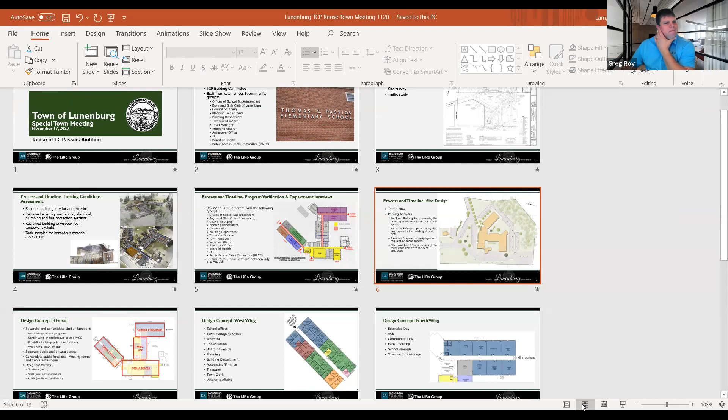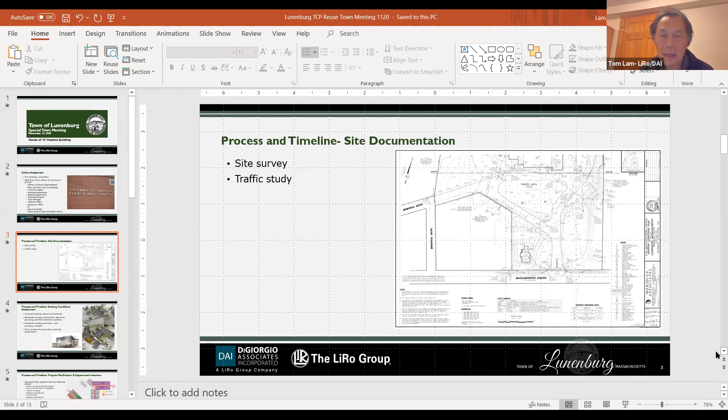So again, we start with the overall cover slide, then the acknowledgement slide that included the different departments we've been talking to. And then we identified a couple of surveys we've done to prepare the report. So these slides are still the same. The next slide is the different existing conditions assessment. So this is still the same slide.

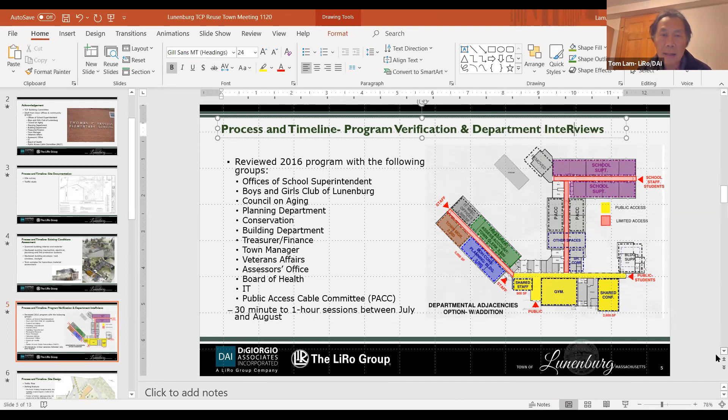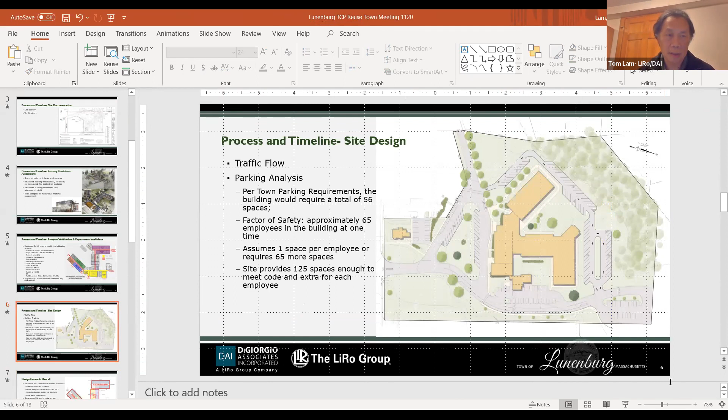So now here are some differences. We combined the program verification and departmental interviews, essentially combining the diagram and the list of folks we talked to over the last summer. The next slide, we have a new rendering from the civil engineer, and they identify the different parking analysis. Again, I'm just going to breeze through this and we can come back to talk about that further.

So these are some of the slides we added as a response to Mr. Jeffrey's comment last week. So we decided to do an overall design concept, essentially separating what we're doing, separating the different functions, separating access, consolidating public functions, and designating different types of entries.

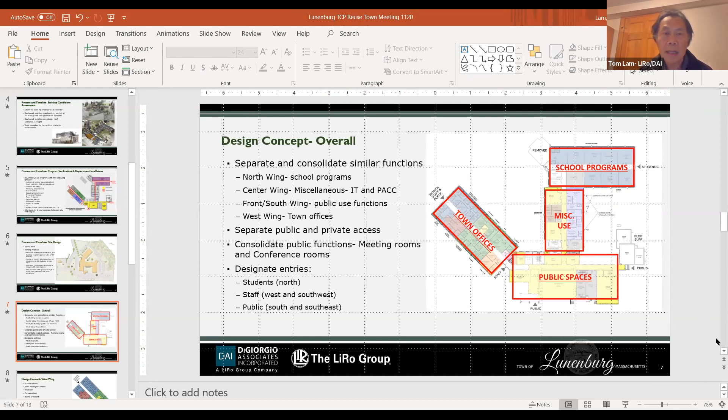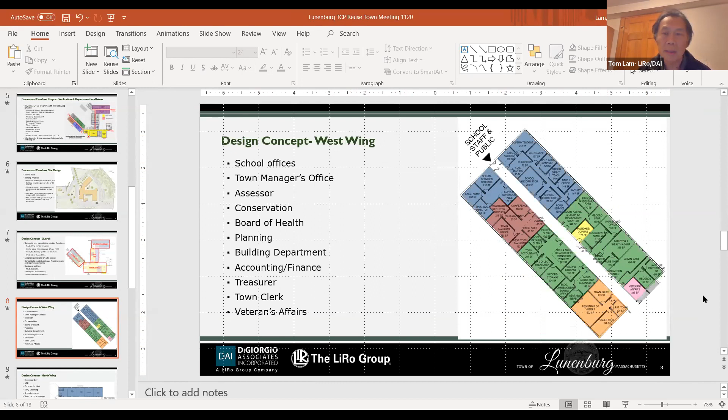And then we have a more detailed description of the different wings, started with the west wing. So we identify the different departments that we have. Then we move on to the north wing, which is essentially all the different school programs. And then the next slide is a combination of the center wing and the front area, or the south wings.

And we identify the multi-purpose room or the gymnasium, meeting rooms, conference rooms, and that the meeting and conference rooms are equipped with recording capabilities. Within these two areas, we also have IT, Lions Club, and PACC. And then we move on to

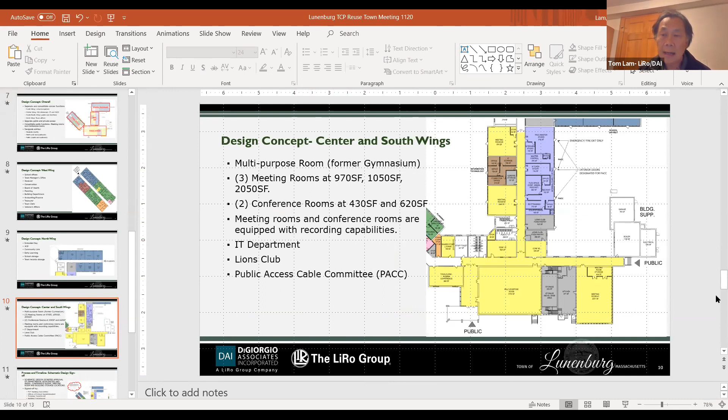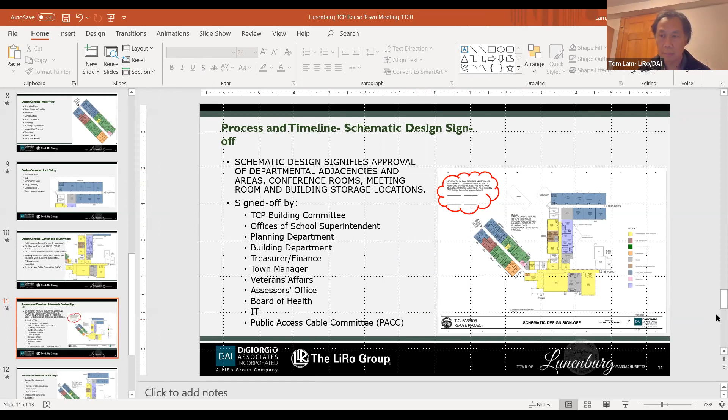the design, schematic design sign off. Again, the wording is the same, except that we clouded this title block, the sign off block, which really has the description on the first bullet point. And we talked about the next steps, what we're going to do. Again, this is the same slide from last time, and then we ended with the thank you. So that's the last slide we have.

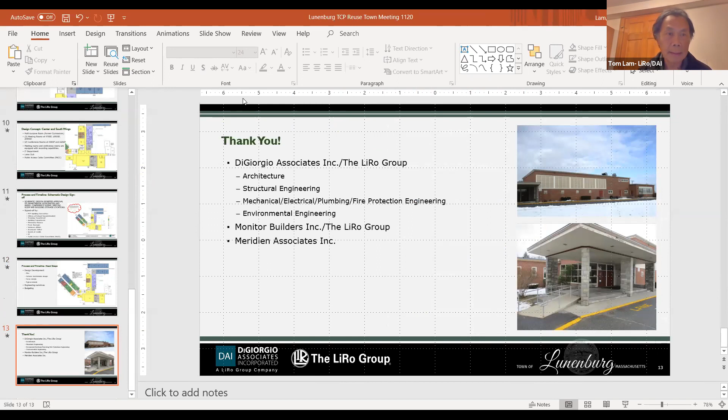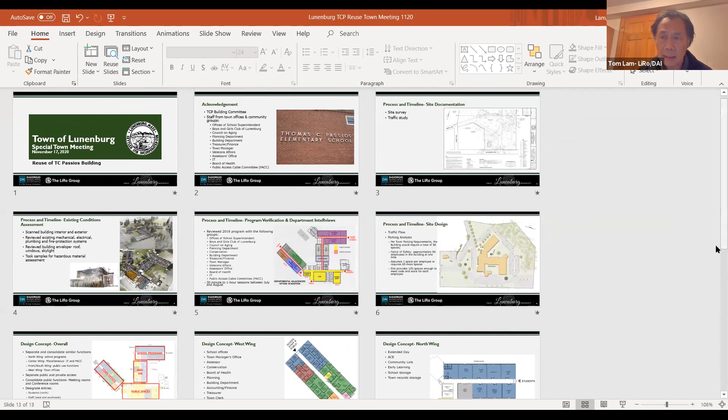So just a recap, we consolidated some of the front end slides, added some more detail about parking, and have a little bit about the different design, how we came to what is the design concept, or the planning concept.

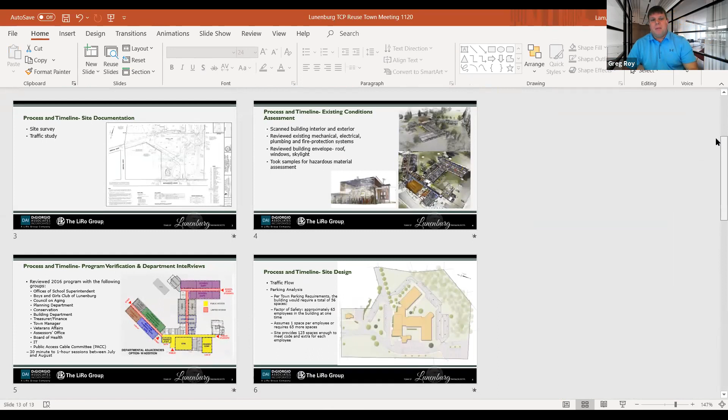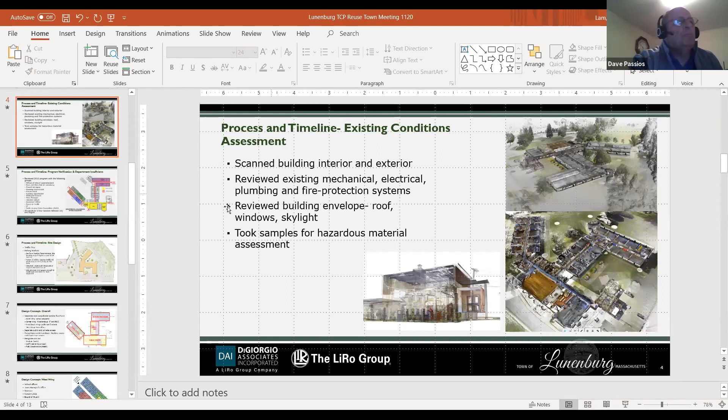I think that would help a lot, because the review up to now, that I'm seeing on my screen, it's difficult to read them as they're moving quickly. And if Tom could expand out that screen a little bit, it would help. Yeah, can you go to presentation mode, Tom? I think if you do, yeah. Okay. Oops, go back, I don't need animation. I don't know why it's animation. Of course it is. Hit the presentation on the bottom right, the little screen on the bottom right, that one will stop it from going automatically. Oh, thank you. All right, so now you can just use your back arrow to go back one. There you go. Yeah. Oh man, it's good to have someone that's a professional at this. Hey, too many PowerPoints, only 7 of them today, so bear with me.

Okay, all right, why don't I just go through this, why don't I just ask you, does anybody have any comments relative to this slide?

I would put the town offices, town manager, town clerk, assessor's office, building department, all those first. Then start with the offices, Boys and Girls Club, Council on Aging, and things like that. So kind of an emphasis on importance first.

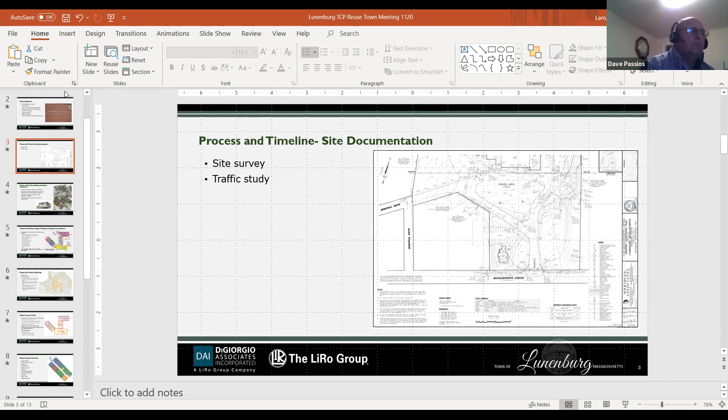It's the story of my life, Tom. It gives the layout of the entire property - I don't know how visible it's going to be up on the screen at town meeting, that would be my only question. But it gives you an overall view of the property, and then the next slide gives you a closer look at the building itself.

I think if you go over it quickly, particularly if they have it in a handout, it would be good - just the existing conditions plan. Then at least you can be describing really quick what it is on the presentation. But it could be a 10-second slide, that would be my thought on it.

I suggest we keep the Meridien survey drawing. We used the other one - that was just the front driveway, so the building wasn't on it at all except the very front edge. Yeah, use the one that matches the other, yeah, okay.

Slide 3. Mr. Chair, my goal is to get this down to 10 slides or less, because if you figure 2 to 3 minutes a slide, you're at 30 minutes. How many do we have? 13.

Well, we could just eliminate it. Putting it on the other slide might be a little too busy. We can just put the 2 bullet points into the next slide, just put them right into that other slot. You can consolidate this and don't do the boring civil engineering survey drawing graphics - who wants to read those?

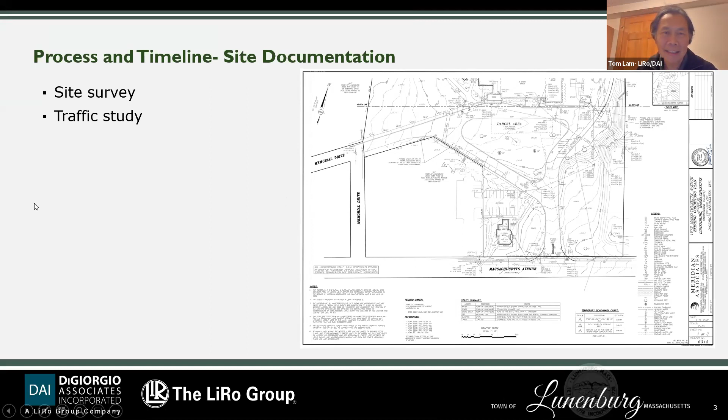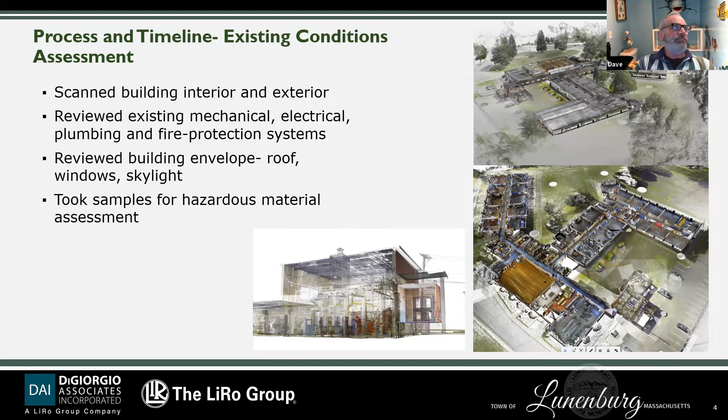All right, slide 4. Go ahead. So I'd say just add the 2 bullets from the last slide onto the end here. Yep, I think that'd be good. And this one's beautiful, a perfect slide - and now I'm going to mess it up.

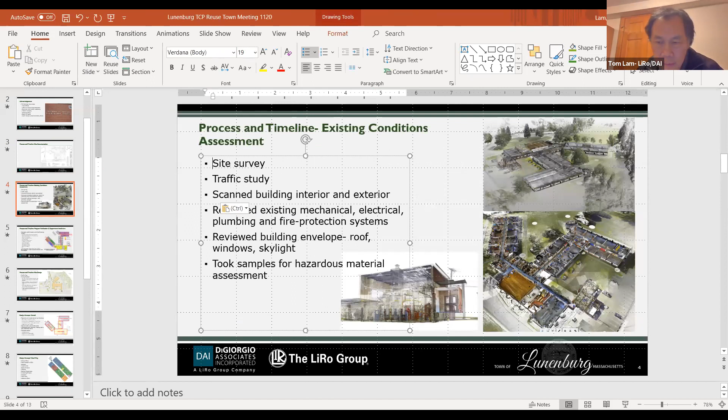On this one, I wasn't a fan of the picture because I feel like it might confuse people, since it's a different iteration of what we're going to be presenting in slides later on. I don't know if we could do a better visual, or a different one. Maybe throw up the civil engineering one again. I'd rather see the entire plot, with the parking all the way around the building, than this slide, because we show the building sectioned into its sections later.

Are you questioning the slide content or the graphic on the slide? Just the graphic. Okay, so maybe just substitute out the graphic and put the site plan on there.

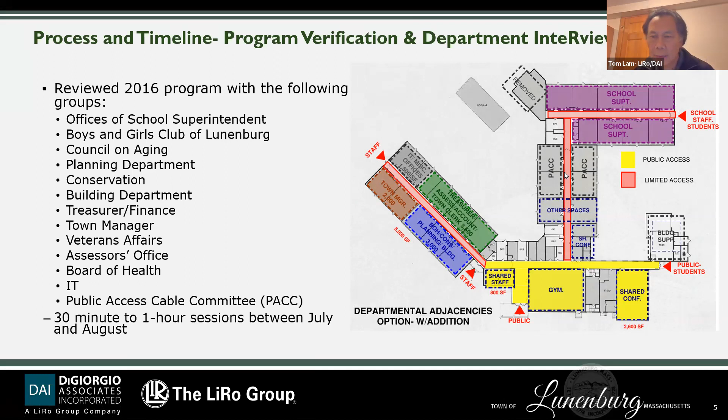The survey site plan? The graphic on the next slide is what I think they talk about. Oh, that one, yeah.

But then what are you going to use for process and timeline? Same one? Same one, okay. I like that picture, it gives you a full view. Okay, so we'll put this one up.

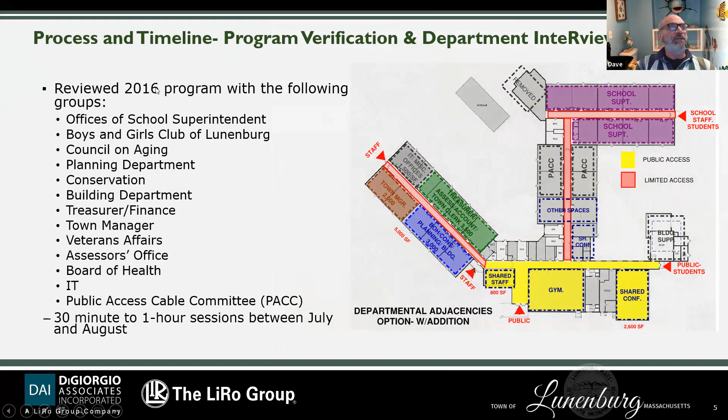We'll swap this one out. Instead of 'review 2016 program with the following groups,' just say 'interviewed between July and August the following groups.' And for the last bullet with 30 minutes to 1 hour sessions, just say between July and August, interviewed the following groups. Then you can have it as town offices, school offices, Boys and Girls Club, and things like that.

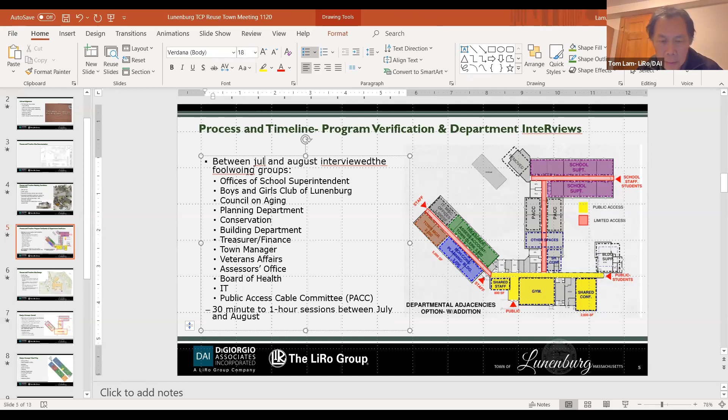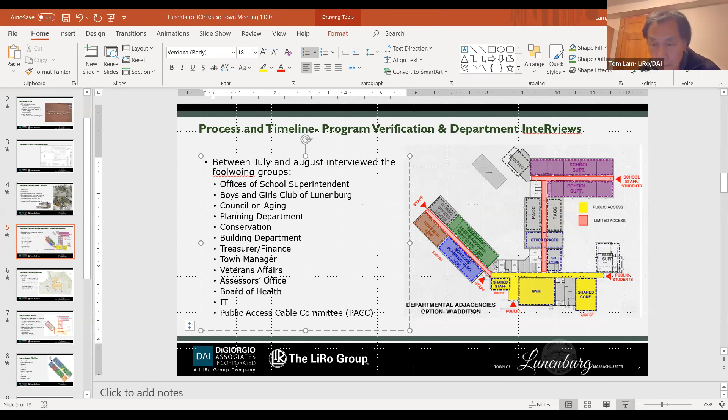Okay, and then I'll take this one out, because I don't want them to have a limit on it, 30 minutes to an hour. Oh, you only did 30 minutes with some? Why only that much? Okay, yeah, that's pretty good. It's the little things.

Anything on this one? Looks good, I like this one.

Hey guys, how about instead of public, we use community? Yes, community use, that's what I was thinking. Okay, community use.

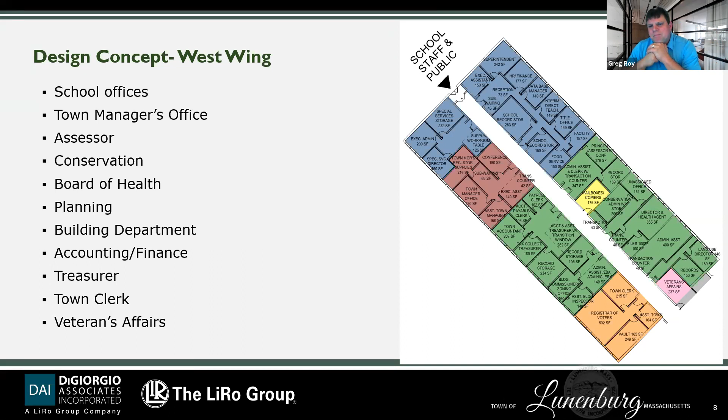Yeah, that's it, everything else is fine. Tom would probably tell you those are details that are the task of the next stage of development. I don't know whether we can take those out now, but that door is simple to remove. We'll take care of it.

To Mr. Jeffrey's point, that's the kind of question we're going to get on the town meeting floor. I think you'd be amazed - someone's going to look at it and just ask why we're putting a door there. Anyway, it's a good point. Okay, I think we're good on this one. Next.

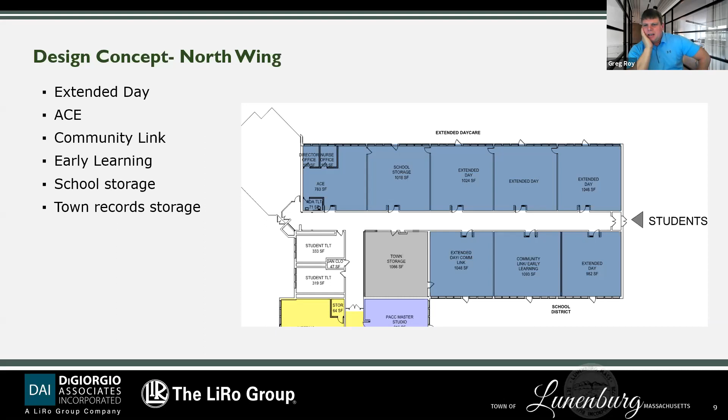Yeah, I think this gives credence to what Dave said about putting the T on the overall, because it's presented that way on the slide anyway. So I think that was a good comment, Dave, from before.

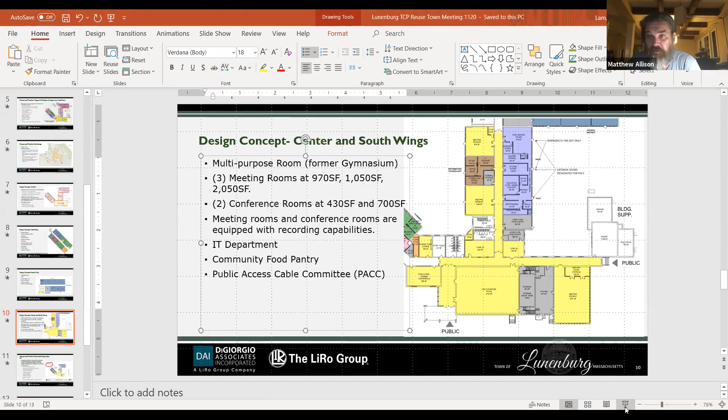Of course, I think the two conference rooms, the gym, or the cafeteria - either one - I think it would be preferable, the cafeteria with the use of the kitchen. But I've got so many questions and comments that really aren't appropriate at this stage, and I don't want to bog down this presentation. I don't have a problem holding off until after town meeting to bring up my issues. But yes, to answer your question, either one would be adequate for the Grange. Thank you. Thank you.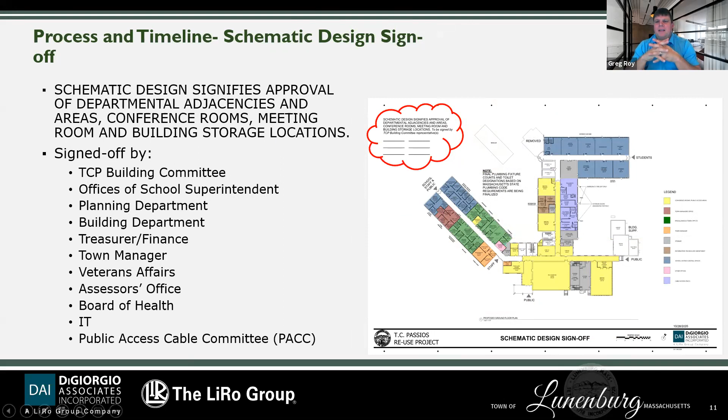Pretty good, yeah, I think I kind of agree. We can just say we've received sign-offs from all the departments and agencies represented in the plan. In fact, as you're going through the wings, you can say this wing was signed off by the town offices and schools, this wing was signed off by the school, this wing was signed off by PACC, things like that.

I'm inclined to disagree. I think that in addition to the town meeting presentation, this would likely be posted on the town website. So for people who choose not to watch the whole thing in detail, this may be a helpful slide. I think it can be glossed over quickly during the presentation, but for someone who doesn't observe the full presentation and just looks at the slide set, I think this would be helpful.

I tend to agree with Michael. During our discussions about this subject, one thing we felt was it would be a selling point that we took the step to have each individual department sign off on this before we signed off, so that if there were any issues, we'd address them and then sign off on it as a committee. We talked about that for a number of minutes, and I think it's important to be seen. Like Michael says, you could gloss over it quickly, but at least it's there. And anywhere these slides are presented, including online on the town's website, this information will be right there in front of everybody.

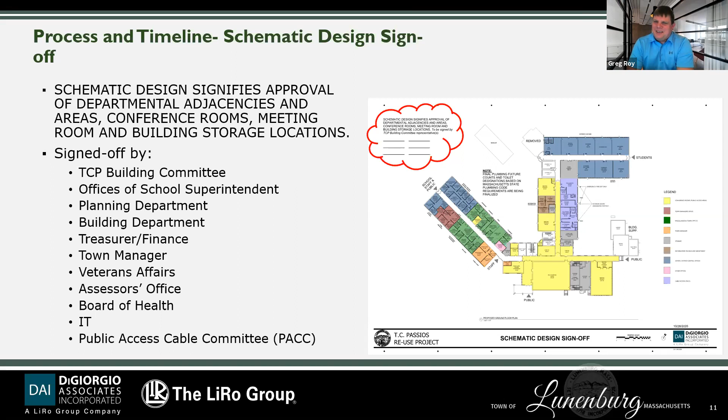Fine. All right, Brian, do you have a comment? I just was going to say I agree. Mr. Allison, any opinion one way or the other? No, not really, thank you. After hearing that, I tend to agree with the latter point. I don't have a strong opinion either way, but I think you could just move quickly through it. Okay, next slide. Dave, you want to respond? No, that's fine, I'm fine. That's why it's a committee. Yeah, no, I know. Okay, good.

My only comment on this one is I'm not sure engineering narratives is going to really mean much to people. Maybe you mean like systems, building systems type analysis. Maybe move it back so that it's the same level as typical details instead of highlighting it as a separate bullet point.

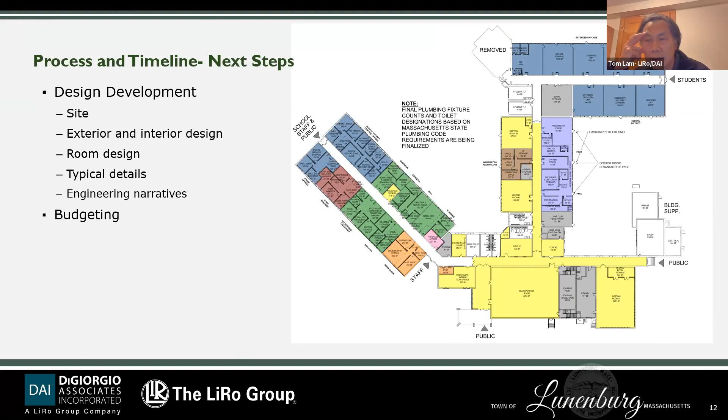So if I just move this back - by engineering narrative, just so I understand what you mean, are you meaning like the mechanical engineers' review on the mechanical systems and the electrical engineers' review on the electrical systems, that kind of thing, and what they propose so that it serves also as a basis of design as well? Maybe change it to engineering basis of design, or something people are going to understand, like analysis of mechanical, electrical, plumbing, building systems, or something like that.

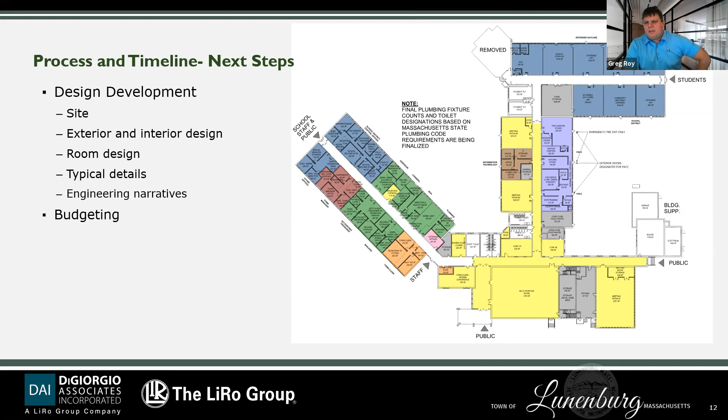Do enough people understand what physical plant means? Because that covers all of those. Yeah, that'll be important - people will question that if we don't say it. Are we going to upgrade the HVAC? Are we going to upgrade the drinking water system, and so forth? Analysis and proposal and upgrade of building systems or central plant. Central plant sounds good, something like that.

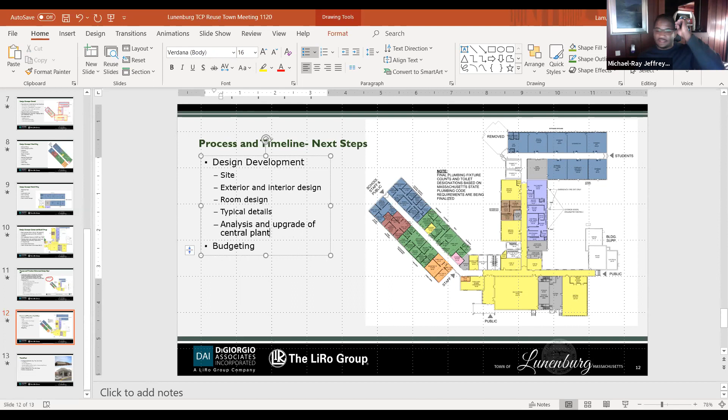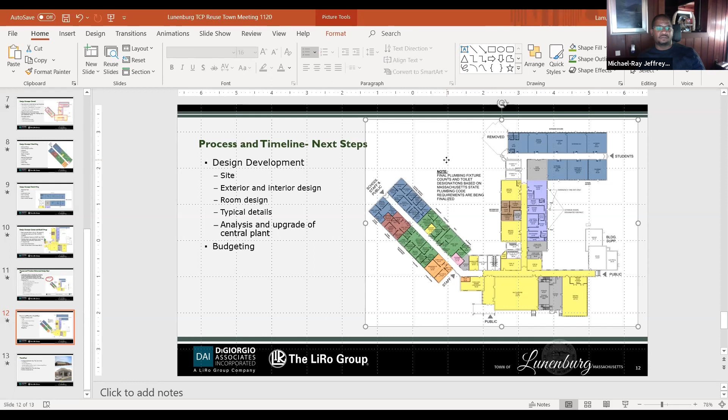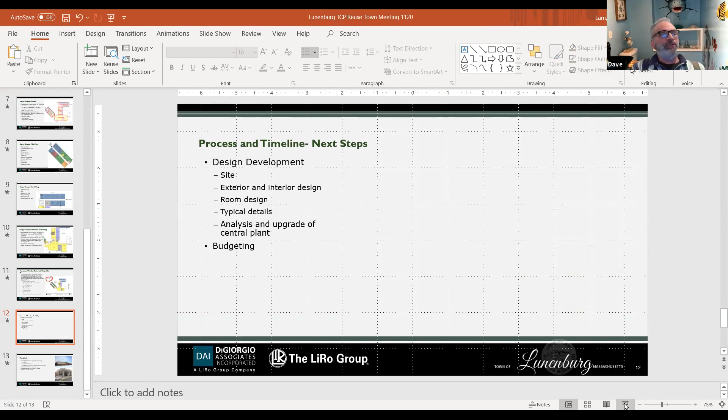I would also just note, while you're doing that, that the graphic on the right-hand side is different than the one on the previous slide, so just use the most recent version - I'd probably use the one from the previous slide, just because I don't think the words about plumbing need to be put in there. Yeah, we'll take it out.

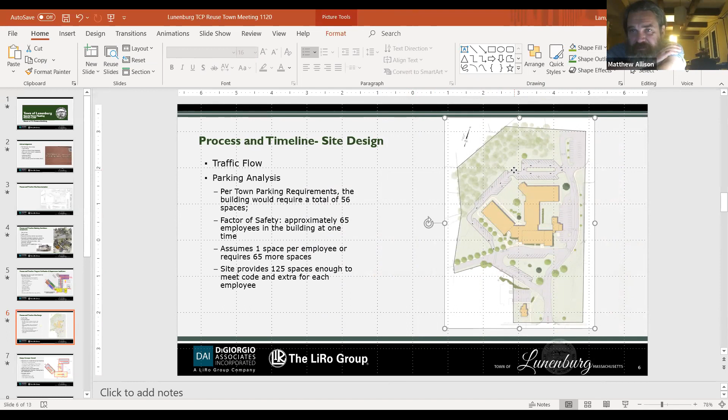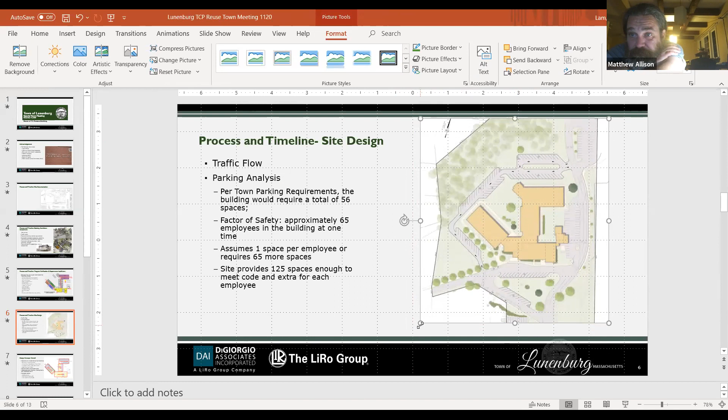It seems kind of small, but that's how most people look at that space, and how all the other graphics are oriented. My suggestion to fix that would be to emphasize the north arrow, but yeah, I think this does present better. I would agree - what if we crop some of that? Yeah, you can crop it. There you go. Yeah, I think that's good.

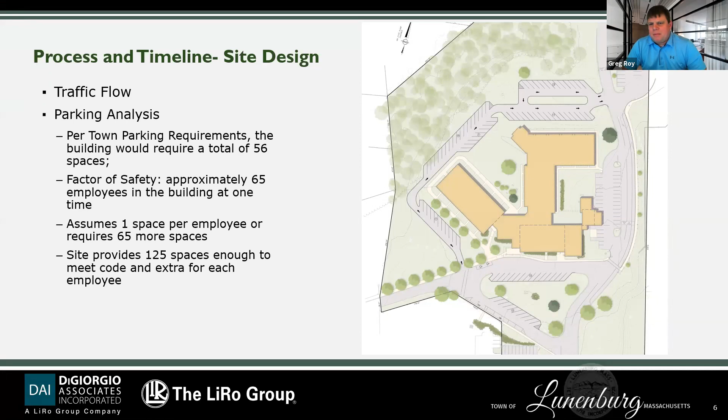Look at that, amazing. Okay. Anybody else? Looks good, guys. All right. Thanks, Tom, I appreciate it. Does that give you enough guidance, Tom? Sure, yeah, I'll do the tweak and send you the file. Yep, appreciate that.

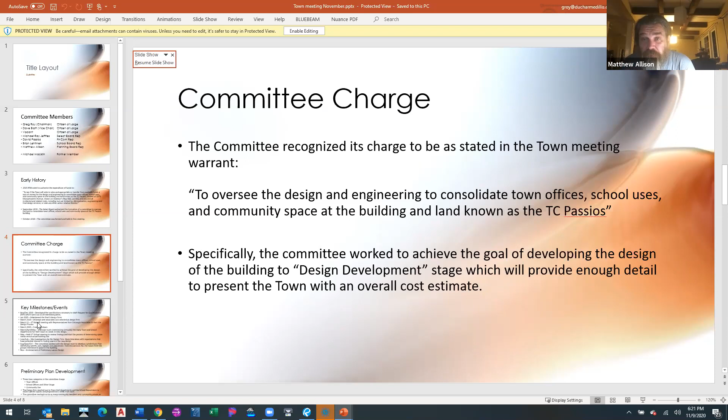January 2020 - I'm sorry, can I interrupt for a second? Yeah, absolutely, go ahead. I do need to head out for the planning board meeting. Okay, but I do have a couple of comments I want you guys to hash over or think about, at least.

As far as I know, the skate park is still proposed and has been given permission to locate adjacent to this property. You should be ready for questions about that at town meeting, and probably from me about the property line separating this from the school campus. And thirdly, the build-out of the full back property line in the woods, because this was included in the village center district zoning, which has very lenient zoning abilities for expansion. So just a couple things to think about that may come up.